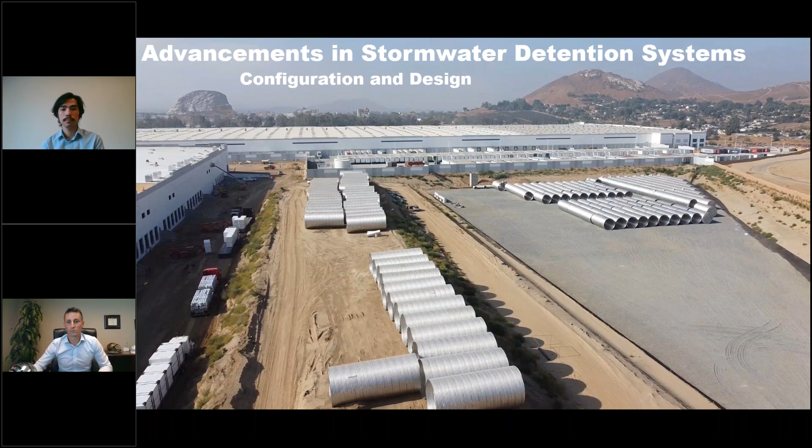Today, we will discuss how to design detention systems faster and how to protect stone void space from solids contamination.

While everyone is still logging on, we'll take this time to start off with a poll question. Our question is, my go-to caffeine drink of choice for when I need to crank out some work or do a design is soda, espresso, coffee or a latte, an energy drink, or another, I don't drink caffeine. We'll take some time now for you to mark your selections, and thank you all for joining us today. Most of you have answered. Thank you. Here are the results. It looks like most people go for coffee when they need to get work done.

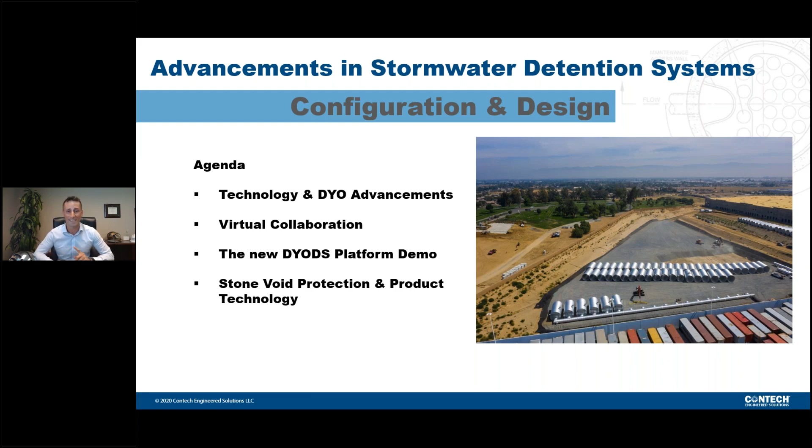Second, we're going to have Yuya review a great new technology that's exclusive to Contech. It's going to protect your design and minimize downstream flooding risk. And best of all, it's an add-on to an already great existing underground stormwater product. I mentioned virtual collaboration. You'll hear that a lot. We have a lot of great collaborators attending this call today. Many engineers have already reached out to us for product tours. We've done it via Teams, via Skype, via Zoom. We've actually designed systems in real time in 3D with contractors, developers, owners, and engineers all on the same call. It's very exciting stuff.

So we're going to dive right into DYO DS first. What is DYO DS? Some of you may know, but it's actually our design your own detention system. The name's been around at Contech for almost a decade, but these updates that we have are definitely killer as we see them. Why did we need such a big update though? We need to discuss the pain points that are out there with design and layout software. We all know that they're out there. What do we have? So users need to share login information on a lot of systems that are out there just to give others access to projects and designs that they've done. Worse yet, you may have to recreate something from the ground up just to get to where you need.

The engineering change process, it's extremely tedious. Last minute changes to a project, running into utilities on a site, they can be killer and just make the software, the layout process, downright unusable. And then lastly, everyone has their idea of what's intuitive and how you can handle the system. How far are you getting with this DYO design and layout stuff? Are you getting 10% of the way there, 25, 50? Are you lucky in actually getting 75 or 90% of the way there? And then lastly, deliverables. Sometimes they take forever, sometimes they don't come at all. And then who knows what's on them? We're really working to change that, to bring up that next evolution of deliverables that we can give to engineers, and engineers can pass those on to others that need them.

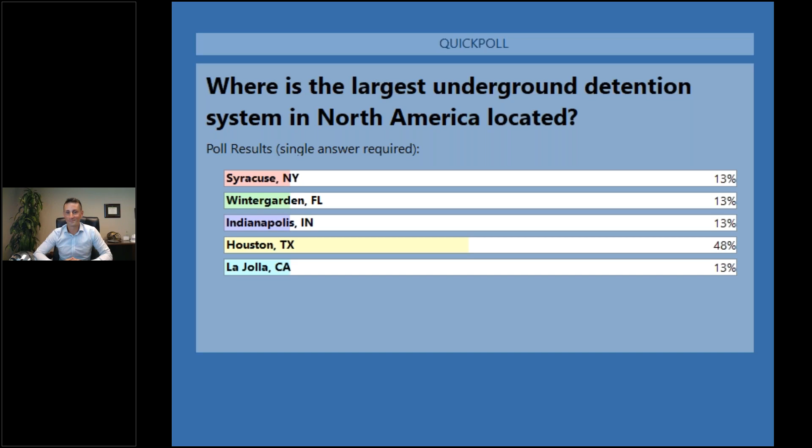Here are the results. It looks like 13% think it's Syracuse, 13% say Wintergarden, Florida, 13% say Indianapolis, 48% say Houston, Texas, and 13% say La Jolla, California, Rob. All right, well, it is Houston. Interesting that everything else was the same.

All right, so we're gonna get right into the thick of things with the demo. So what to look out for as I go through this next portion here. We're gonna design 2 systems, one from the ground up. We're gonna recreate a project that we did. And then the other example that we're gonna give is a very early stage deliverable that's really impactful for what you're able to get out of the system.

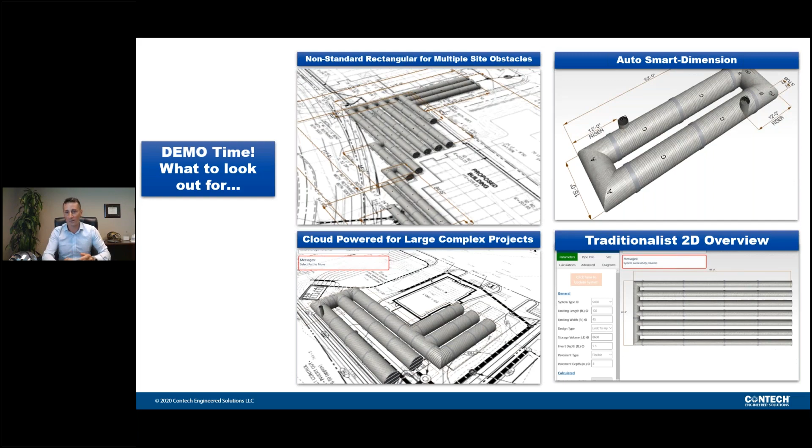So what to look out for. I mentioned non-standard rectangular design. So you see that stair step system in the top left there. Auto and smart dimensioning, top right there. Move risers, inlets, and stubs. Very easy throughout the system. I mentioned cloud power. It's very fast. Don't take that for granted. And then for the traditionalists out there, we do still offer that same 2D environment, same toolbox and CAD system that's off on the right there. So we're going to get into it. I'm going to pull up the actual system itself right now.

I mentioned the all-new cloud system. I got a few example projects here. So for this actual webcast, we're going to go into this August DYO webcast. I'm the only collaborator here, but if I wanted to add Yuya here, I could go in and type Yuya's email address. He'll get a notification that I've started some designs here.

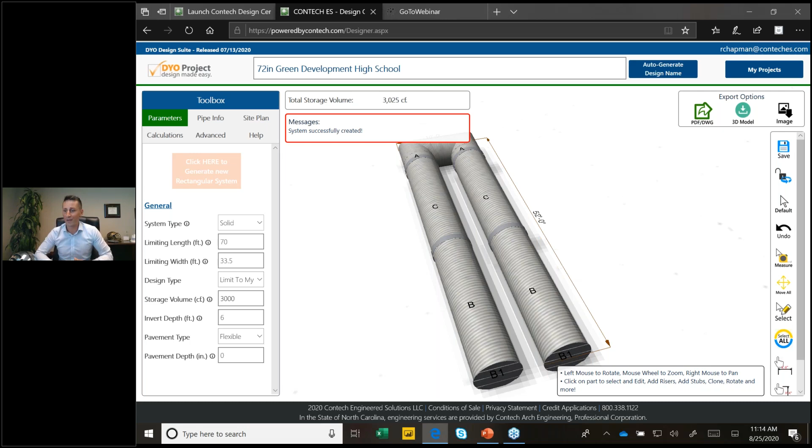So diving into here, the first system we're going to do is an actual system we're going to recreate from the ground up based on something that we've done in the past. And that's a system we did in the Pacific Northwest a little over a year ago. And it's a 21,100 cubic foot storage system. And it was done for a high school to preserve a green area on site. And what we're presented with here is the intro to the system. So I haven't done anything here. I just titled it 72-inch green development, and you're presented with a simple here.

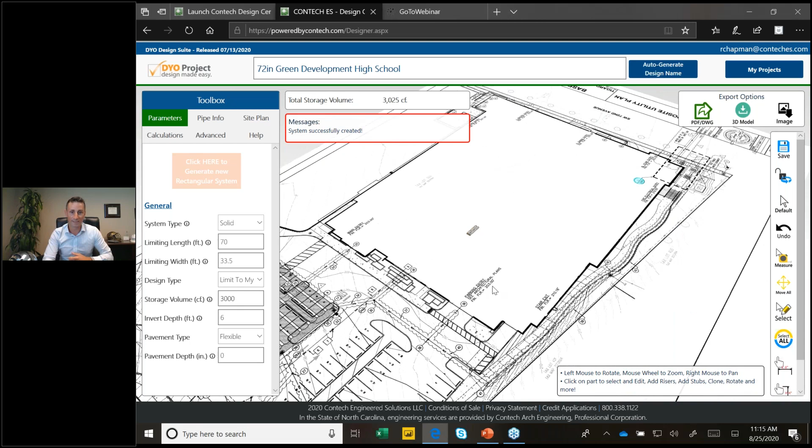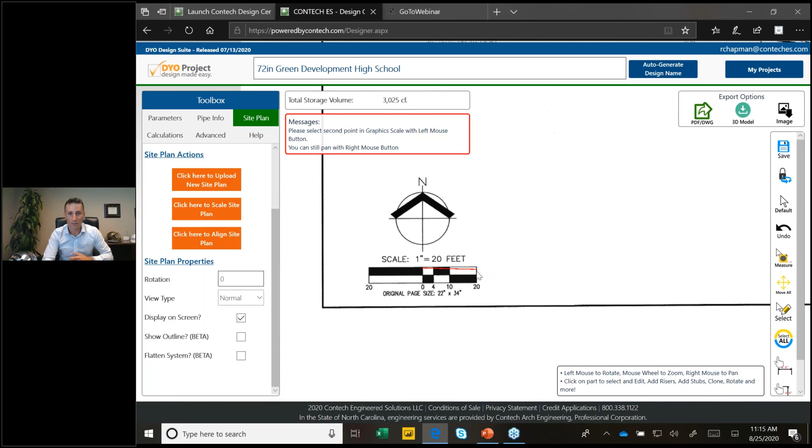What I did do though to speed it up is you could see the site plan here, and it's not to scale, but what we could see here is where the existing system is, and then you have the high school there. So we're going to actually scale this and then start designing. So scale site plan, we'll zoom out and we'll find the legend here. Click there and there, and that is 20 feet.

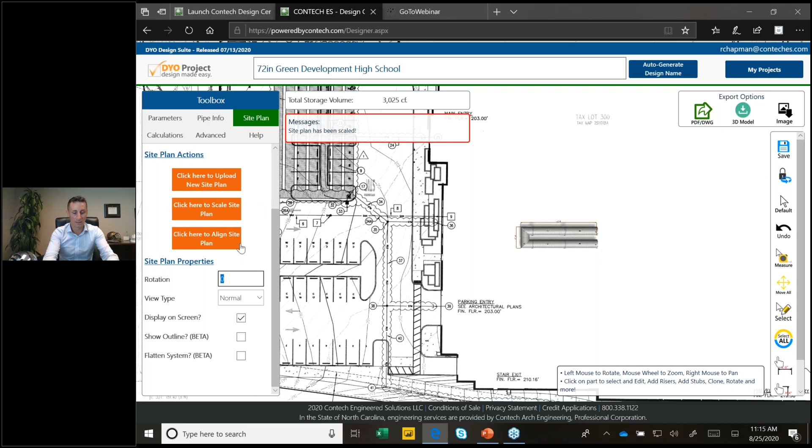There we go. So things look a lot better to scale there. So not every PDF comes in as you want, as everybody knows that's worked with them. So we're actually going to rotate this to be in line with our prior design, negative 90 degrees there. So there you can see the existing system, and then we're going to move this up and then start working from the ground up.

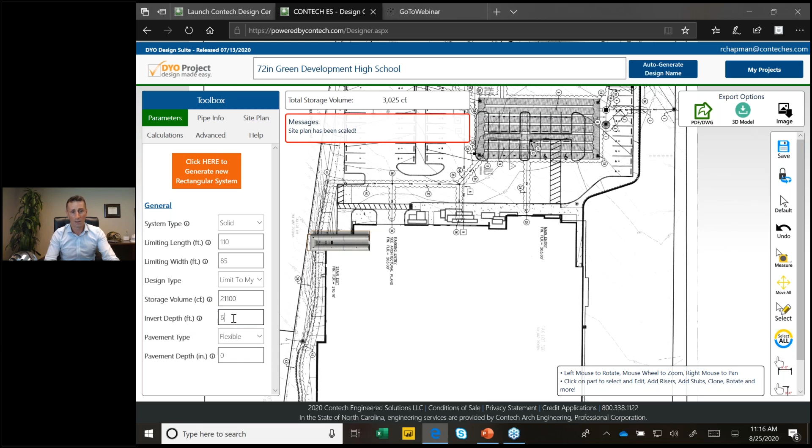So I mentioned keeping it simple and intuitive. So system type solid or perforated for detention and infiltration. This system length was 110 foot. See, I already practiced this. 85 foot wide. I mentioned the two design options. We're going to limit to the storage input because we've already gotten numbers that we need to use for other engineers on the project. So 21,100. This was buried fairly deep for a detention system at 12 feet, and then 4 inches of pavement there.

And then we're going to regenerate that. You can see the system getting bigger there. And we do know that it was a 72-inch system, so we're going to change this from 126 to 72. And then there we go. I'm going to move this so we can see it better. And then we do offer a toggle, so if you want to switch between the traditional view or the actual 3D isometric view, you could do that.

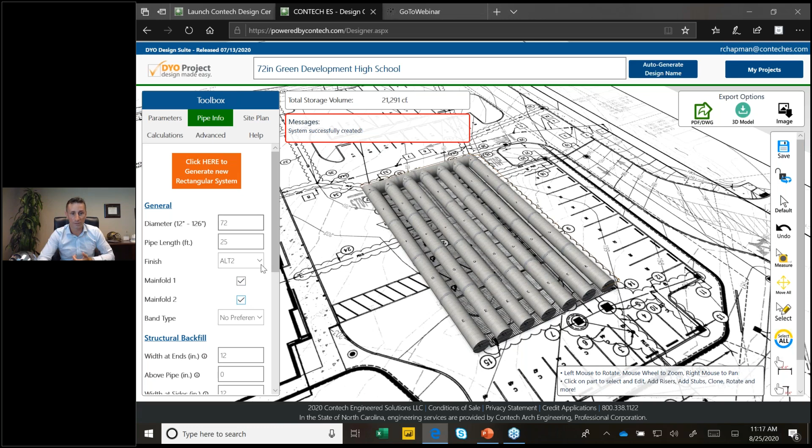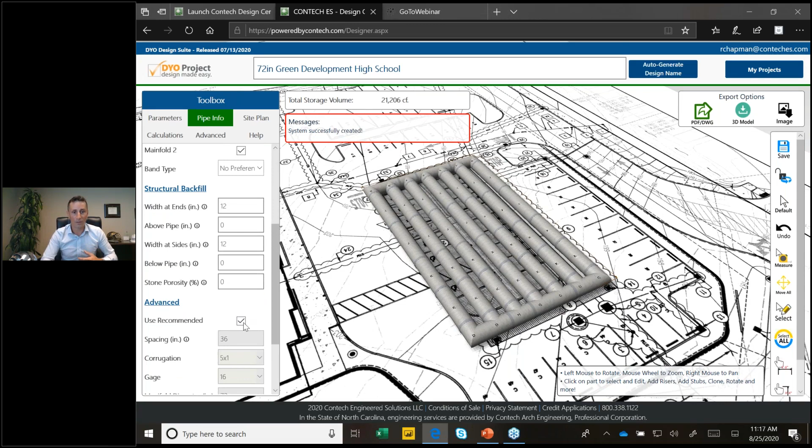Our systems default to bulkheads for efficiency along the whole process, but the system is a little bit older, so it did have 2 manifolds. And in order to do that, in the pipe info, you just click 2 manifolds and then regenerate. And here you can see that it put on that second manifold. There was some structural backfill things that the team had done to get 36-inch spacing. I believe that was the last thing they did before we can start adding risers and tees. So you can see just how perfect that lines up to our existing system.

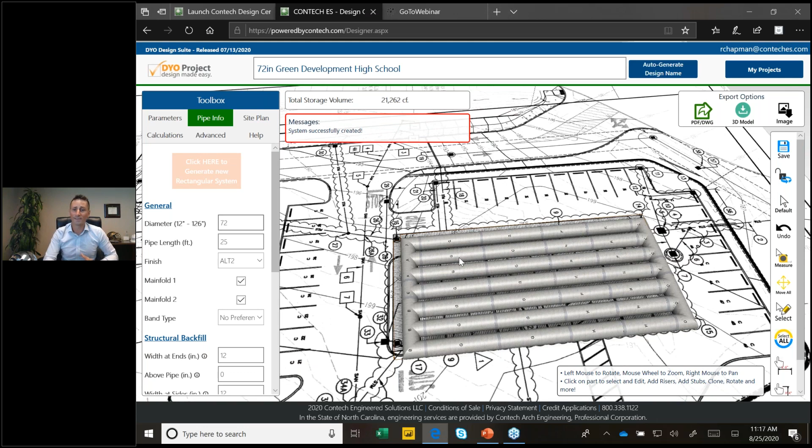So what I'm going to do now is add an inlet right here and then just an outlet somewhere over here, just to give the audience an idea of how easy everything is. So first thing I'm going to do is just make sure everything's lined up. And then we're going to get that inlet pipe. And to do that, our CAD tools are off on the right over there. I believe I'm pointing the right way there. We're going to grab this measuring tool, and we could see that this inlet is 2 foot. So in order to add an inlet to the pipe, you go to the Advanced tab, and that's going to bring up the customization.

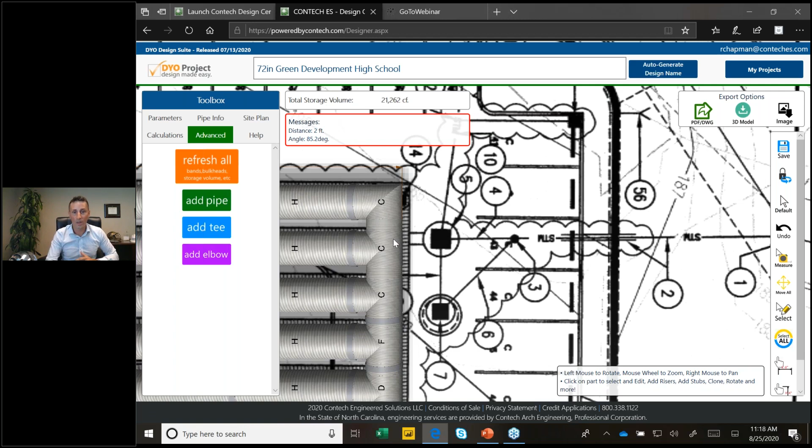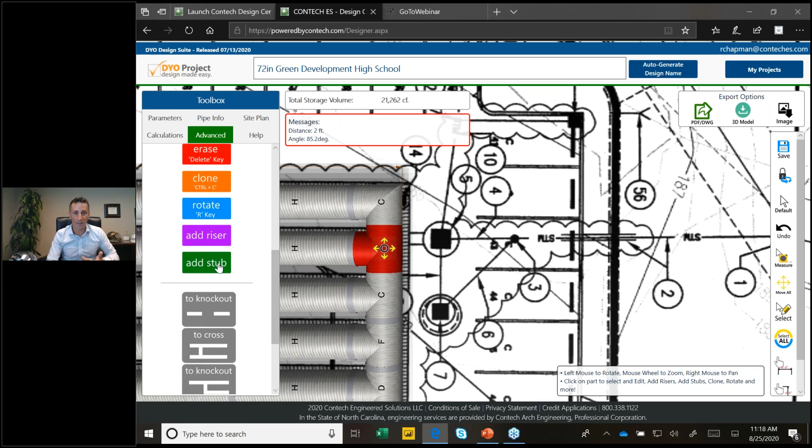So our system's been generally used for 2 areas: full on, we're going to get as many of the risers, stubs, and tees lined up as possible, dimensioning them. And then the next example is just a very generic, we need a deliverable type thing. So I'm going to try and meet halfway with this design. So click on the Advanced section, and then you're going to be presented with a number of options. So you can erase that section, clone it, add a riser, stub, knock it out. So I'm going to add a stub to that. And then you could see as I toggle back over here, it placed a default stub right there.

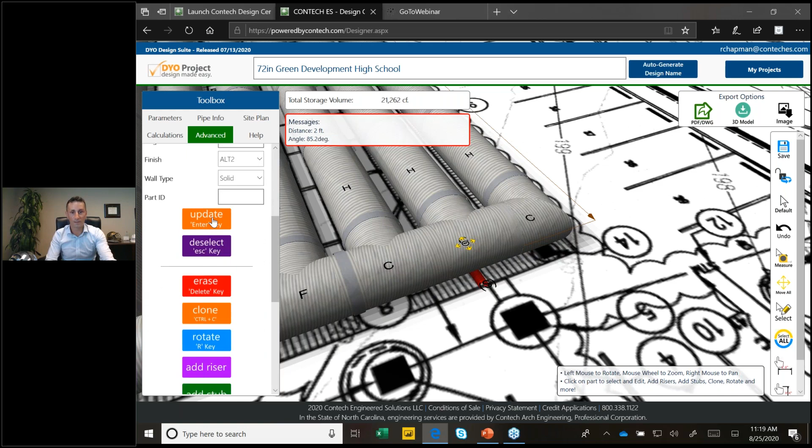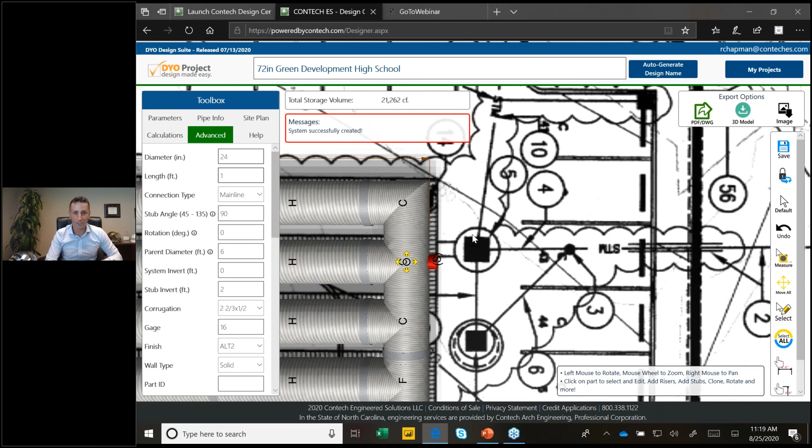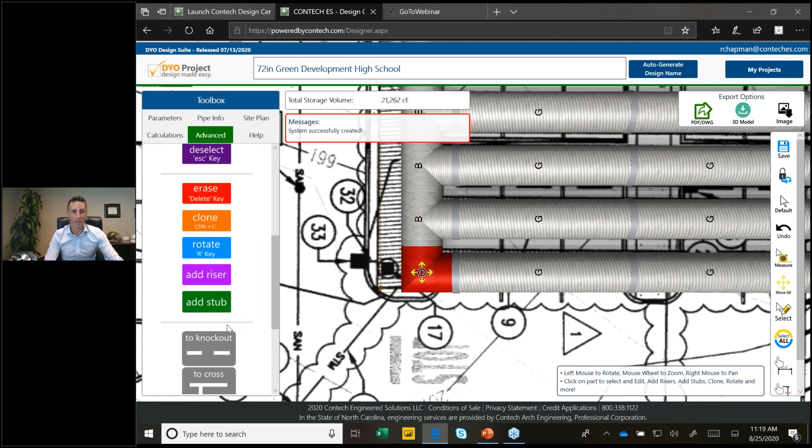So we need to make some adjustments there. I'm going to change this because we know it was 24 inches, 2 foot there, and then we're going to take this 2 foot off the invert, and we're going to update this. There you go. And then I'm going to switch back to 2D mode, and we're going to line this up. So when you click on a piece, you can see you're presented with directional arrows. We're just going to move that to where it needs to go right there. Then we're going to go over here and just add another basic one just to get an idea of how easy it is. So click there, add another stub. We're going to make that 24 inches, and we will take that 2 foot off as well.

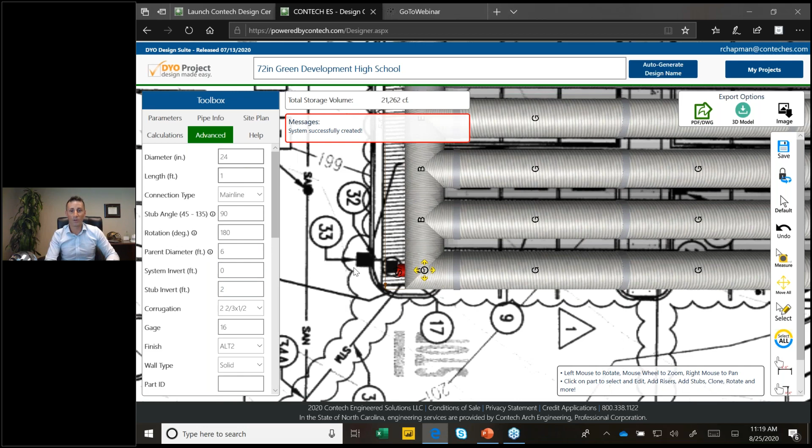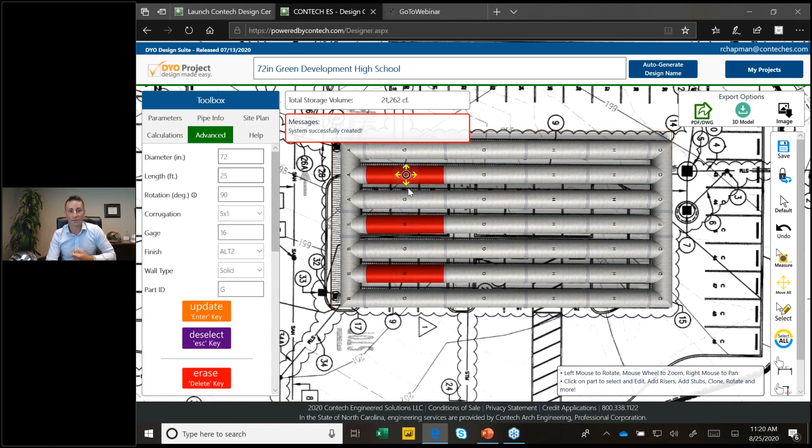All right, and then I believe this system had access risers every other piece. So in order to do that, you can actually click on multiple pieces. Just going to do that, that, and that. So we grab those 3 sections of pipe, and then we're going to add an access riser to those. So now you could see exactly where those are. You could drag them around just like I did with the stub there.

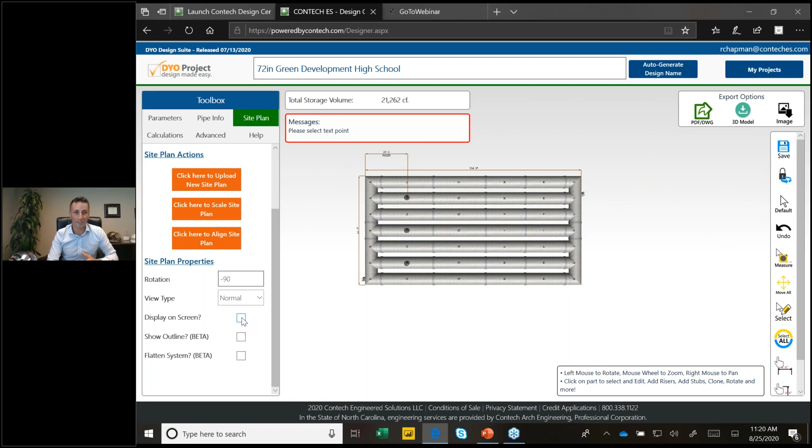And then in order to smart dimension stuff, and you can move things around however you like, traditional CAD tools are off on the right here. You could grab this and then go from point to point and then put your dimensions on there. And to make it easier, if you want to view anything without actually seeing the site plan behind, you could actually click it off so you could see where you're dimensioning to and everything that's going on behind your site plan. So I'm going to leave that as is. On this particular one, they did run into some utility issues.

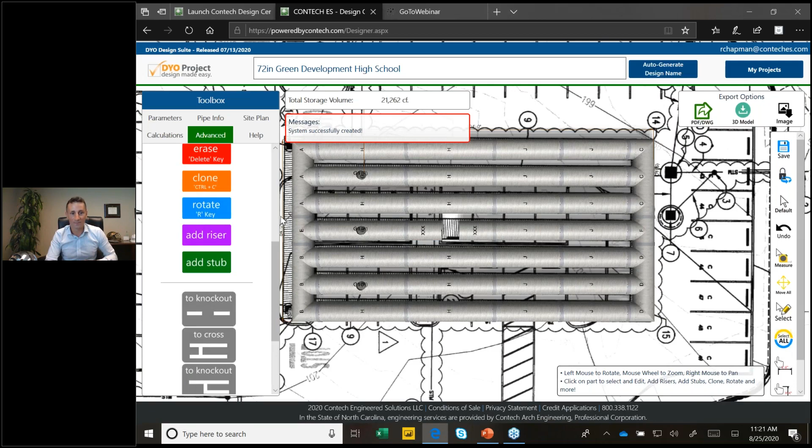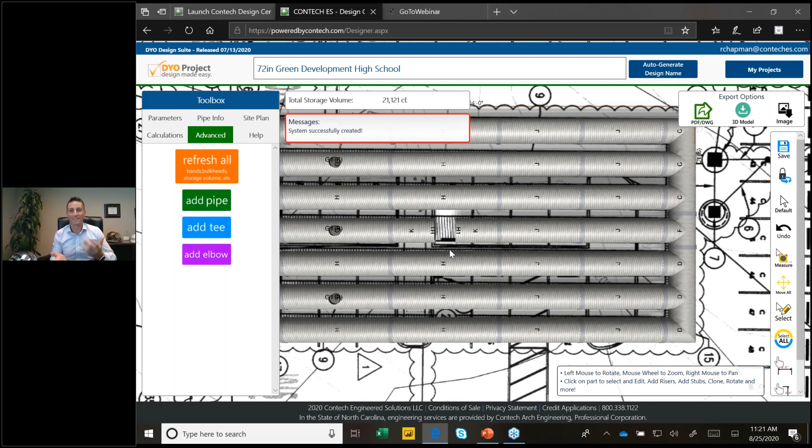And just like adding a riser or a stub, what we're going to do is just go back to the Advanced tab, and I believe it was right in this section here, where they had to knock out a section for a utility pole, and you just go to the knockout. We'll leave it at 5 foot there, and then we'll update everything to make sure that the system automatically puts bulkheads on pieces that have been adjusted for knockouts, T's, and elbows, so it knows where a missing piece needs to be adjusted and make sure that's something that can be manufactured.

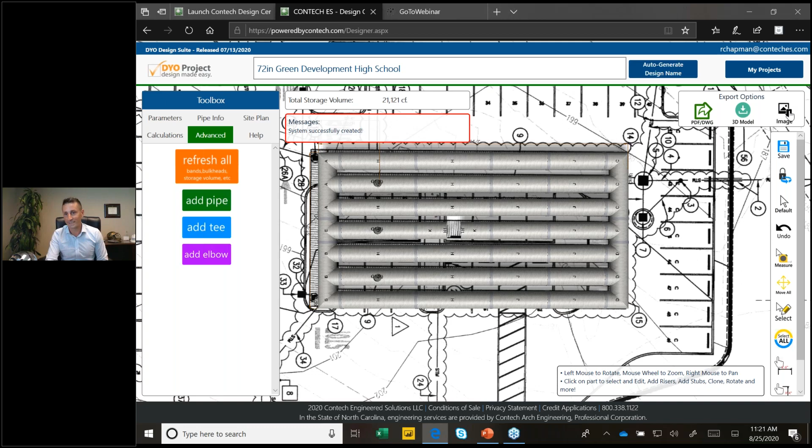We offer 3 outputs over here. So this is the traditional PDF file, DWG file. So the same thing that you got with our prior system, clicking that's going to export that. New to this is the BIM model. So if you need to bring this into another system, you can get a 3D model of this. And then what's been used for deliverables a lot by the community is this image function. All that it's doing is asking you to essentially stage your system how you want on the site plans, and then show you a snapshot so you can put that into another document for yourself.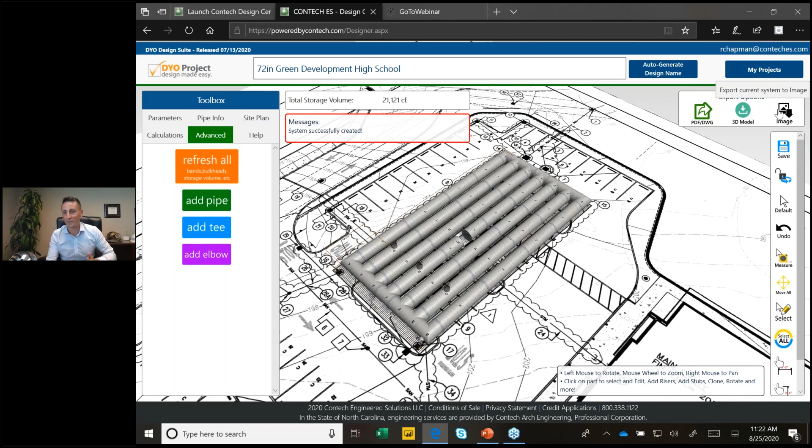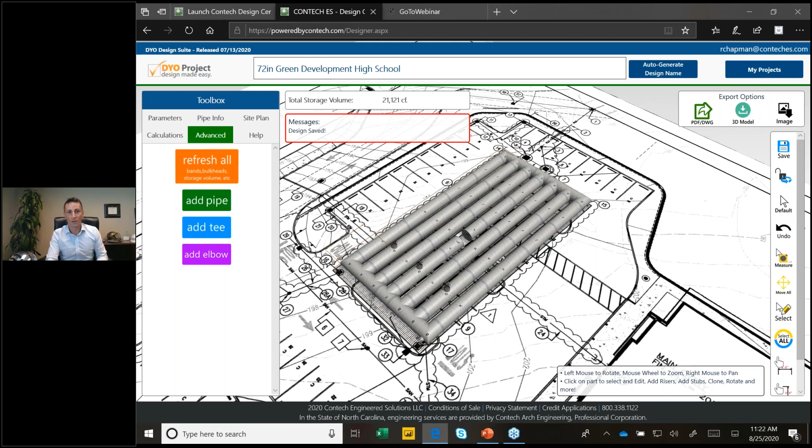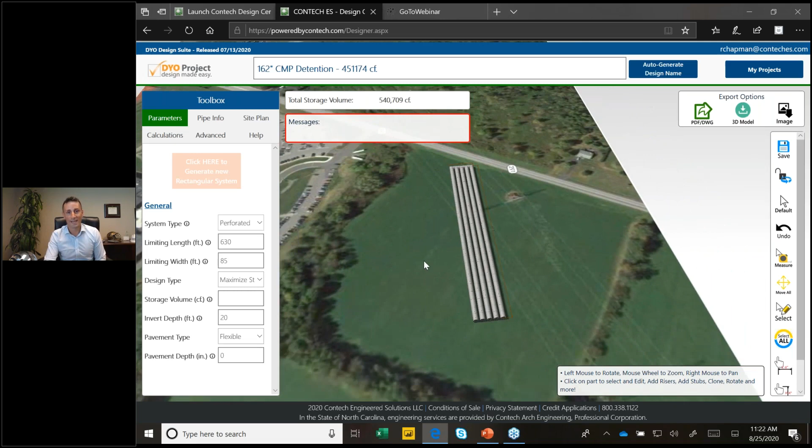All right, so that was the hybrid of the 2 types of designs that we're seeing from engineers, contractors out there. We're going to save this and then hit up the next design. So save, I'll go back into my projects. And then this idea was actually brought to us by an engineer out west, I believe, with wanting to be able to use something very early stage to get out for a deliverable. And what they actually did is wanted us to be able to design on a Google Maps just to get an idea of where something needed to go. Like I said, early stage deliverables.

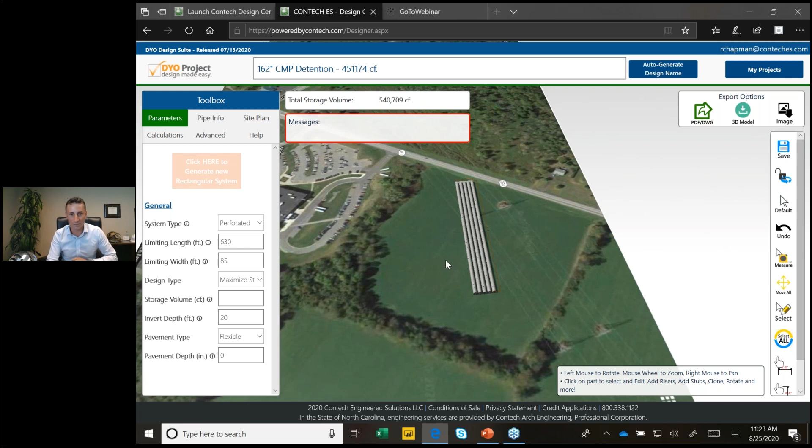So I have imported and scaled this site plan already. This project actually existed. It needed a lot of storage, as you can see. And to give you an idea of the project, there was a warehouse over here and a high school, and they wanted to avoid putting a pond for safety reasons, green space type of thing, somewhere over in here. And we had this very large 162-inch system that needed to go in there. So what I'm going to do is actually align the site plan to make us better aligned with the road. There we go. So it's going to go right alongside the road there. We're going to move it.

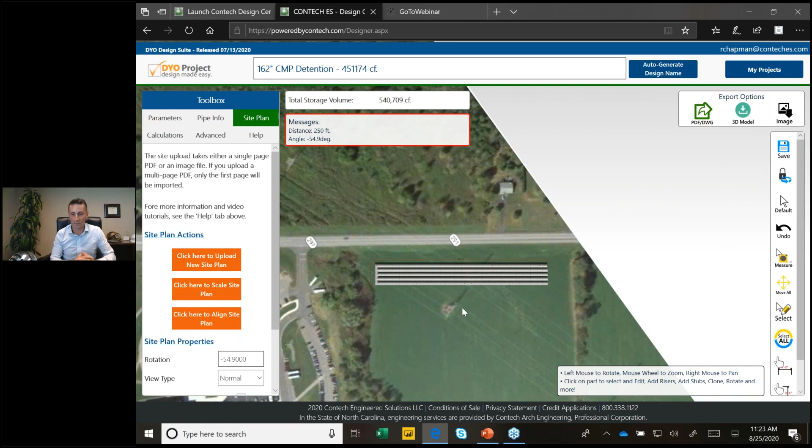And then this system is actually an infiltration system. If you caught the initial project there, there's a perforated or solid type of system. You can do hybrids if you need. We do have projects like that. But the limiting length that they were given was 630 feet. They had 85 foot of space. And what we did is maximize for a given footprint. So how much storage can we get in here? There was a lot of water requirements. So it was buried pretty deep at 20 foot. And then going into the pipe information, you see the 162-inch pipe, 25 foot in length. This was a single manifold system.

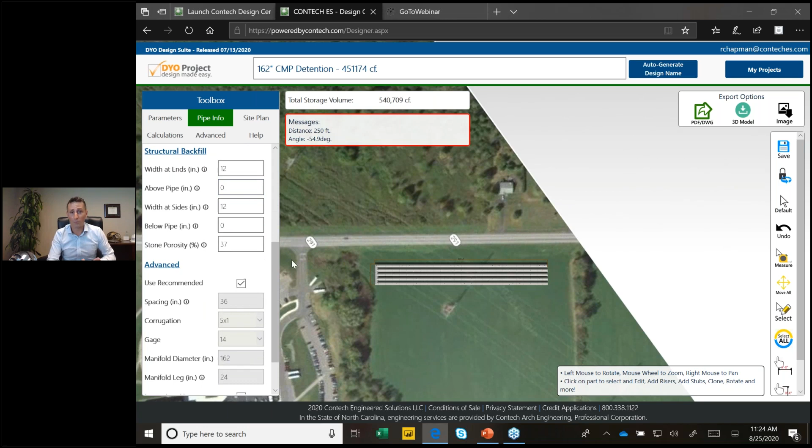The one thing that I do need to change looking at this is, generally in sizes this large, you can get equalizer and smaller diameter manifolds. So I'm going to put one of those on here right now, and we're going to change this manifold to a 60-inch manifold rather than having to fabricate a big 162-inch system. So there we go. So you can see how fast it's working. It's updating storage requirements, giving you the total storage.

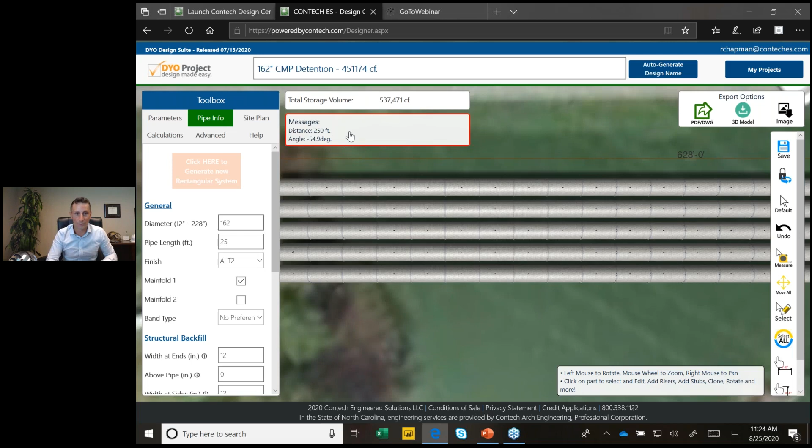If you click on calculations, you could see loading, linear foot of pipe, pipe storage, stone storage, total storage if you had any requirements, and then other calculations that we're trying to fine tune and get everybody exactly what they need from these deliverables. So you can see excavation amounts, pavement amounts if you've chosen to do that, structural backfill, footprint area, and then footprint perimeter.

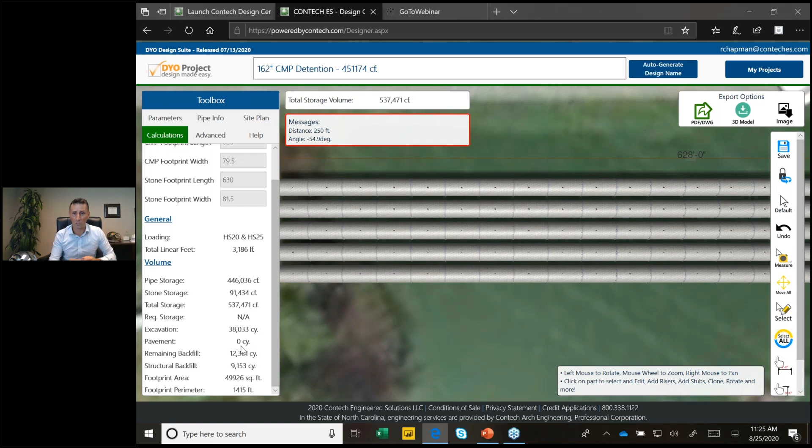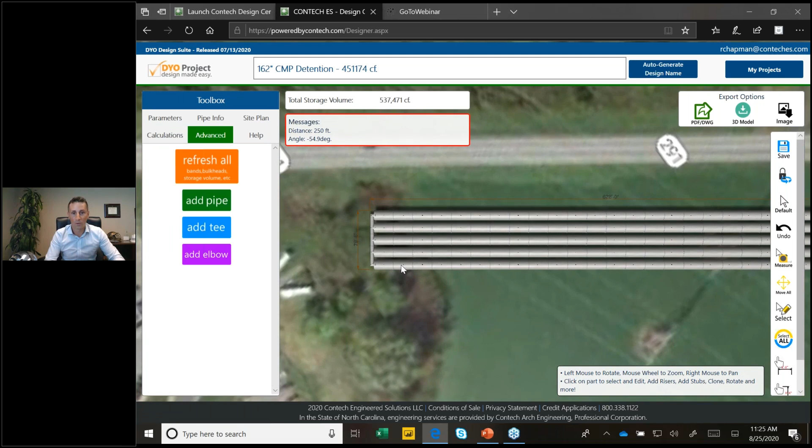So final system looks like this before I go to the deliverables. I'll pan around. You can see that small diameter manifold that's right there. We switched that up to 60 inches and put it on there. And then if you wanted to add risers, something like this, you'd probably need quite a bit. You could just go through and hit the advanced tab and then put them every certain interval, since this is 600 feet in length. There we go. And we'll just put risers there.

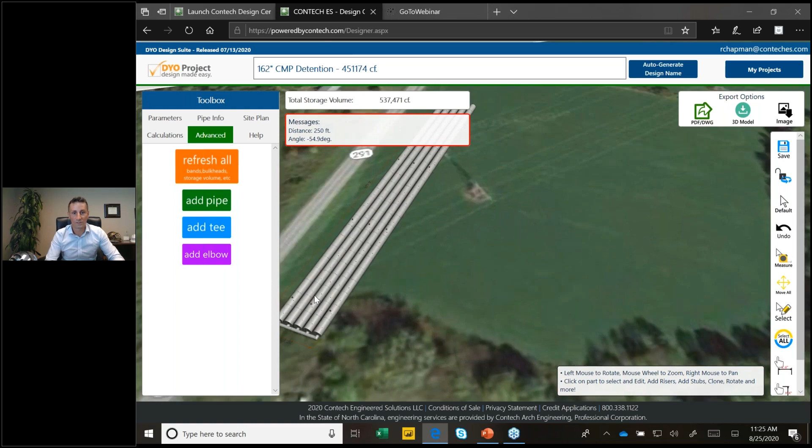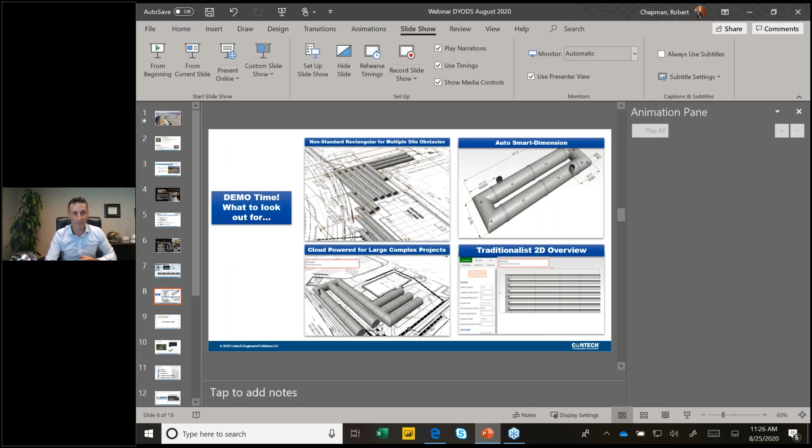The scaling's a bit odd with something this big, but there you can see the manifold with the risers. Not going to go ahead and add a stub, inlets or outlets for time here, because the deliverables are what everybody cares about on this call. So going back to the actual presentation, here are the deliverables. So this is what's included in the email that you're getting from the DYO package.

So off to the left there, you see the high school. Don't see the warehouse, I hadn't developed the design for that yet, but you get some very high level stuff that you need for this stage of the project. It's a 162-inch perforated CMP system. Pipe storage is around 450K. Stone storage around 90. You see the total storage, total area, total perimeter. It's a great deliverable. Our SDE team, that is very well received between them and the community.

And then off to the right there, your standard CAD file, as much as you dimension it. So if you dimension risers, stubs, tees, elbows, make changes to knockouts, and then start dimensioning them, they will show on this DWG file. We need to get you as far as you want in the process, and you could take it as far as you want. There's a lot of options, but what's presented to you in our toolbox is the intuitiveness that we've talked about. Keep it simple. If you want to get more detailed and get further in the process, you can. The further you get in the process, the further we get.

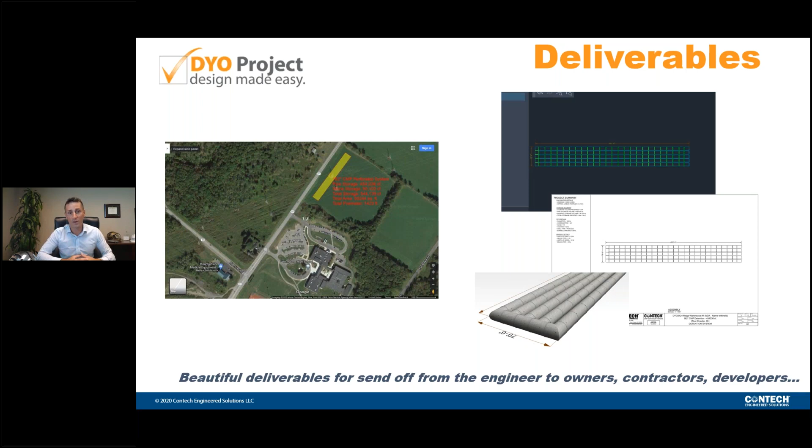Behind the scenes, there's a lot of servers running, powering this. Like I said, 5 times faster. It's generating these CAD files. It's generating stage storage sheets. It's generating fabrication stuff, should it even go forward. So we have everything as up to date as possible in the system. And then in the bottom right there, a BIM model. So there are other CAD programs out there where you can take what's output from the system given to you in an email and use that in those systems.

So a rehash of deliverables, just so you could see it in words rather than the pictures. BIM model, DWG CAD file, design layout, stage storage calculator, and then that really awesome design location on the site plan if you upload that. I will say that we've had some users that have wanted to put multiple underground systems, and all they've been doing is just saving their design. You could see the other system as a snapshot on it and just design a new system somewhere else in the site. So that wraps up the DYO portion. Going forward here, we're going to take a look at the next product that we want to review.

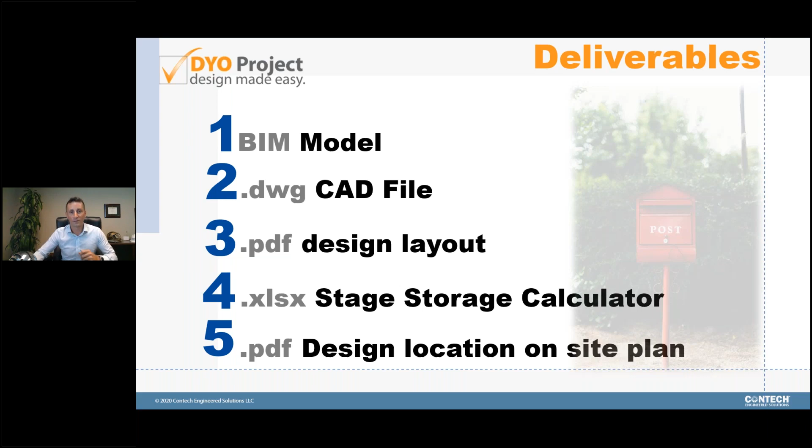And I believe we have a poll question, right, Jill? That's right, Rob. Here's our next question. What stone void percentage do you utilize in design for underground storage? 43% or more, 40 to 43%, 38 to 40%, 36 to 38%, or 35% or less? I'll give you some time now to make your selections.

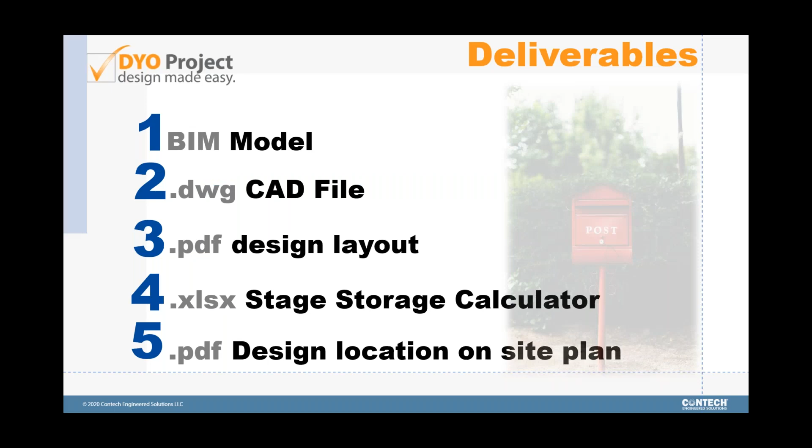And what we're going to showcase right now, we're going to show a video of a new product, the add-on that I spoke about for our existing underground detention product. It's an innovation that we've been developing over the last year. Reliable, protects the stone. It's a low-cost add-on to an existing product. And rather than sit here and go over the technicalities of it, make sure your computer audio is on. I don't know if it's going to come through on the phone, but we do have subtitles for those that are not able to. 2-minute video. It's going to highlight exactly what the Void Saver is, how it can help, and why it aids in design to protect you long-term, minimize that flooding risk.

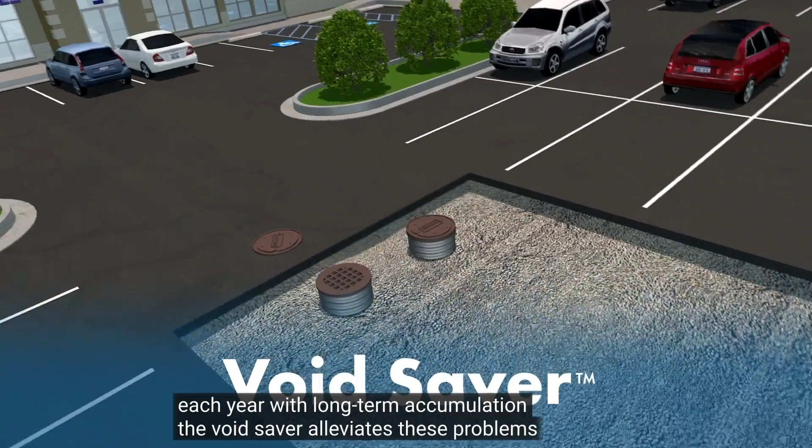Stone void contamination is one of the leading threats to the long-term reliability of underground stormwater detention systems. Contamination from solids can compromise stone void storage before site stabilization and present a compounding downstream flooding risk each year with long-term accumulation. The Void Saver alleviates these problems by containing the majority of storm events within the pipe and only utilizing the stone void storage during infrequent events. As a result, solids are contained within the pipe and not the stone.

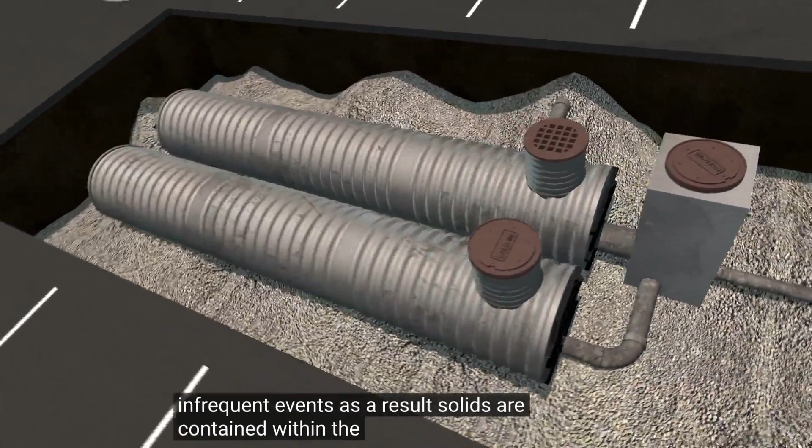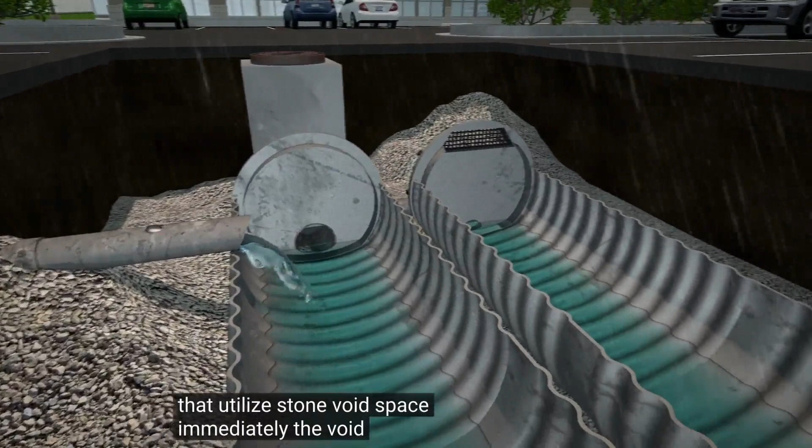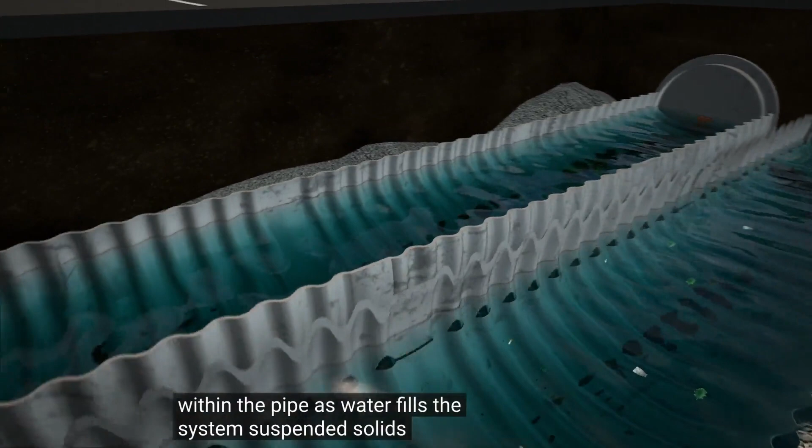Here's how it works. Stormwater enters the Void Saver through one or more inlets from the storm sewer system. Unlike traditional chambers and perforated pipe systems that utilize stone void space immediately, the Void Saver delays the use of the stone void storage by storing the vast majority of rainfall events within the pipe. As water fills the system, suspended solids settle in the large internal volume rather than dispersing into the stone, clogging the stone void space and compromising the design.

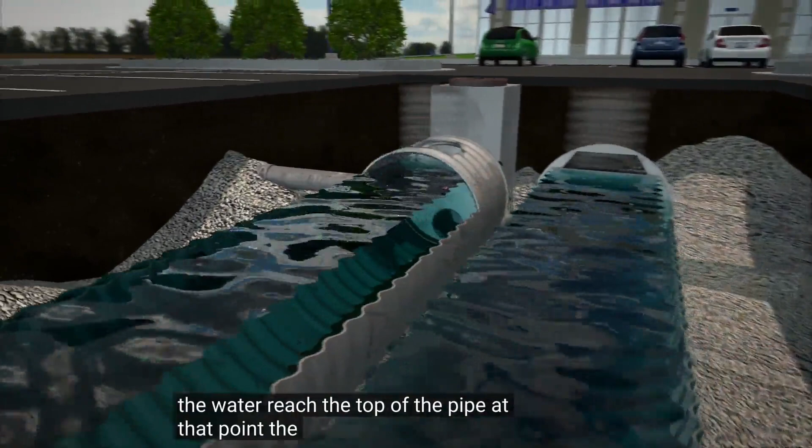Only during extreme events will the water reach the top of the pipe. At that point, the cleaner water discharges to the surrounding stone backfill through a specially designed stone overflow vent. The screened overflow vent prevents any floatables from leaving the pipe.

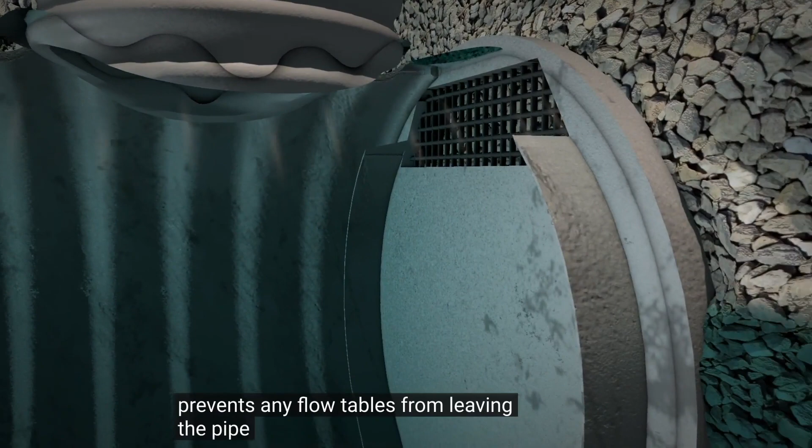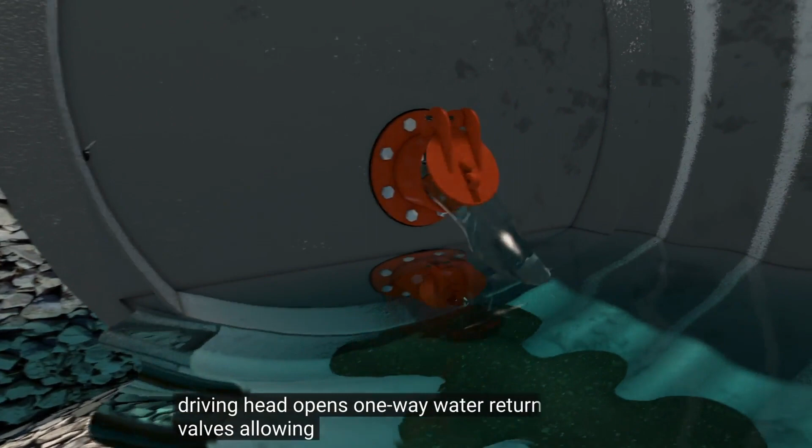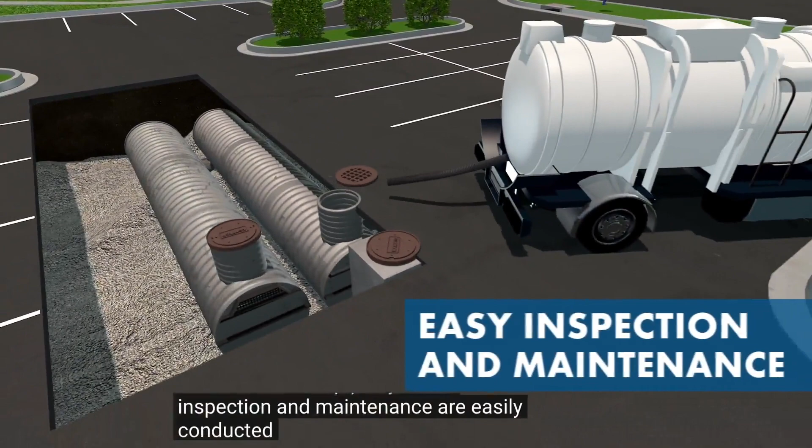After the storm subsides, water within the pipe continues discharging, creating differential head pressure between the water within the pipe and water within the stone. This external driving head opens one-way water return valves, allowing the water within the pipe and stone to drain down together. Like conventional pipe systems, inspection and maintenance are easily conducted through large access risers, where trash and sediment can be removed manually or with a vacuum truck.

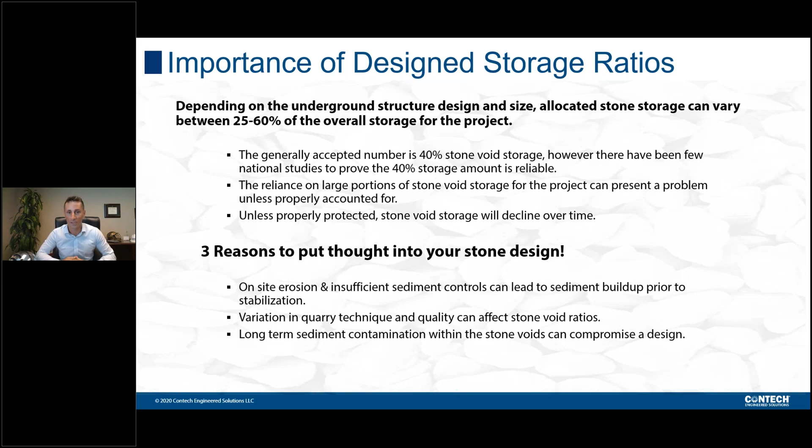Let's go to another poll question, and Yulia is going to take over from here and start talking about why design's at risk right away before you even get to the long-term stuff. Sounds good, Rob. Here's our last question of the day. How confident are you in erosion and sediment control on site? Are you totally confident, commonly implemented, often followed but sediment still finds its way downstream, or they are never followed. Are you kidding me?

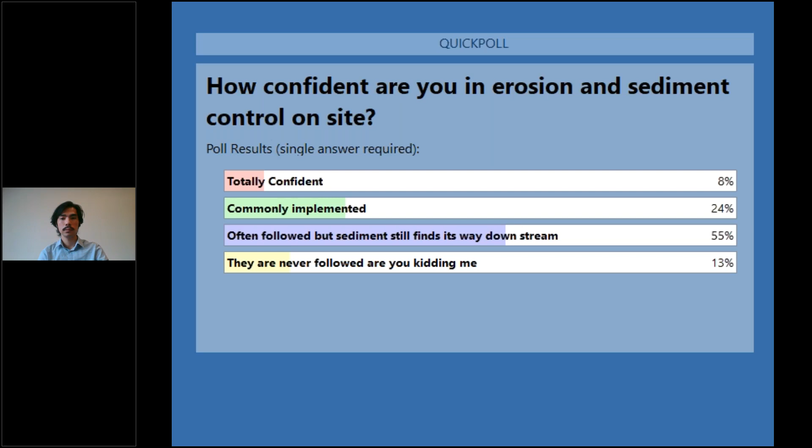Awesome. All right. Well, we're going to have Yulia review just that. Let me move it over. And Yulia.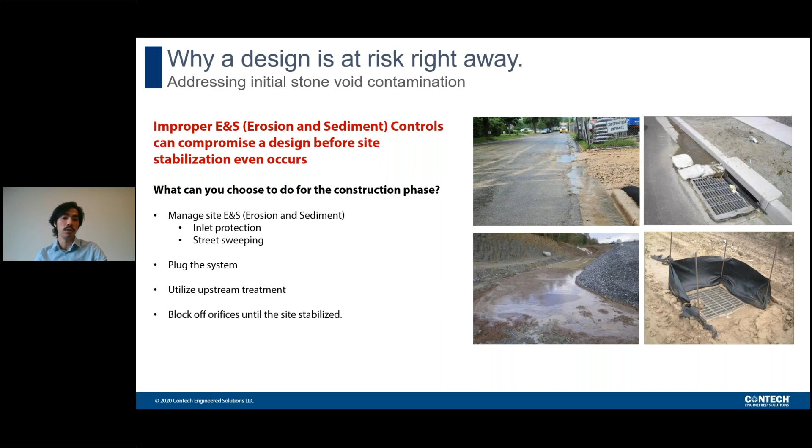Would I need to consider a factor of safety for the construction phase? Or, how much confidence can I place in my storage in the stone voids? These are the type of things that you start asking yourself when you look at a detention system design using the voids in the stone for storage. So what we're going to be talking about next.

So we just discussed design risk during installation, but what about after? This is more in tune with what we typically think about as a post-construction BMP. What could be the long-term effects of stone void contamination in terms of the overall storage capacity of your system? So following up on Rob's earlier point, the industry standard for void space storage is 40%, but it was really interesting to see the variety in the poll question earlier. But if I start there at 40%, is it clear that I get 40% for the system's design service life?

There's no doubt that stone voids are prone to buildup of sediment over time, and there's no going back once the voids are occluded, which results in a permanent loss of storage capacity. So with that, the end goal would be to minimize the reliance on your stone storage. And by doing so, you maintain as much of the storage capacity as possible for your system, reducing downstream concerns.

So here I have a graph comparing a variety of materials of varying shapes and sizes. From the top, 48-inch diameter CMP, 96-inch diameter CMP, 30-inch chambers, and 60-inch chambers. And given the following situation, say if 20% of your stone voids has been occluded due to sediment buildup over time, how much overall storage of your detention system would be lost permanently?

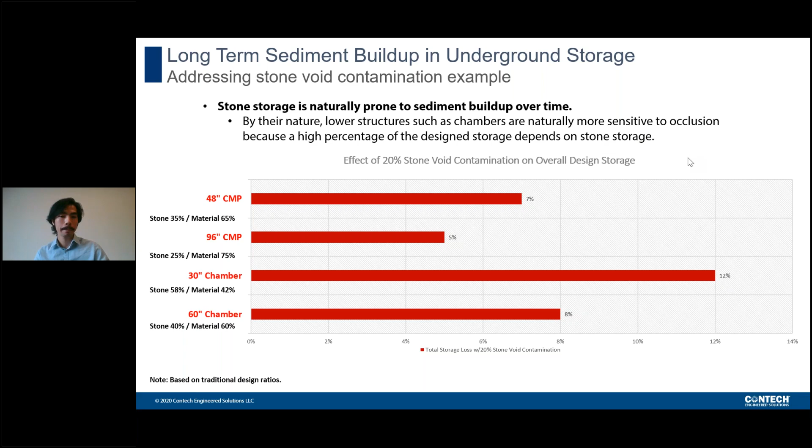So in summary, and given these challenges with stone storage, both during installation and as a post-construction best management practice, just as we talked about, how can I specify a detention system with confidence that relies on stone storage, but does not compromise my design? And this is exactly what the Void Saver looks to address.

The service life of your voids would effectively need to match the service life of the material for your system as well. And by limiting the use of stone storage until it is really needed for the peak events, this ensures that you have a detention system design that you can count on. So to summarize, I've outlined 4 takeaways with features and benefits of a Void Saver design. This more or less summarizes our discussion here today.

First being that it protects the valuable stone voids from contamination, which then protects the storage capacity, minimizing downstream flooding risk. And if there's one takeaway here from the presentation, it's probably that. Void Saver also leverages the use of stone storage, so that reduces your overall system footprint, which leads to an overall lower material and installation cost.

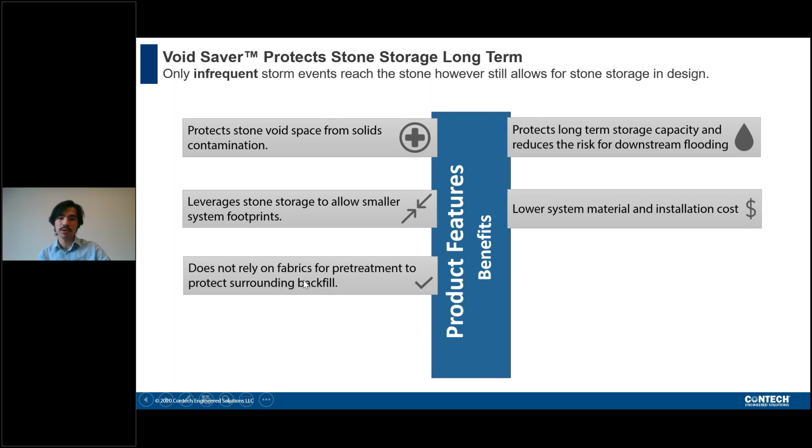In addition, we didn't talk about this in detail, but another feature is that it doesn't rely on fabrics like geotextiles for pretreatment, so that eliminates the concern of potential clogging and ensures a reliable protection of your voids. And finally, specifically the pipe, there's easier maintenance access as well for these systems, which reduces your overall long-term maintenance related costs. So with that, Rob, I will turn it back to you.

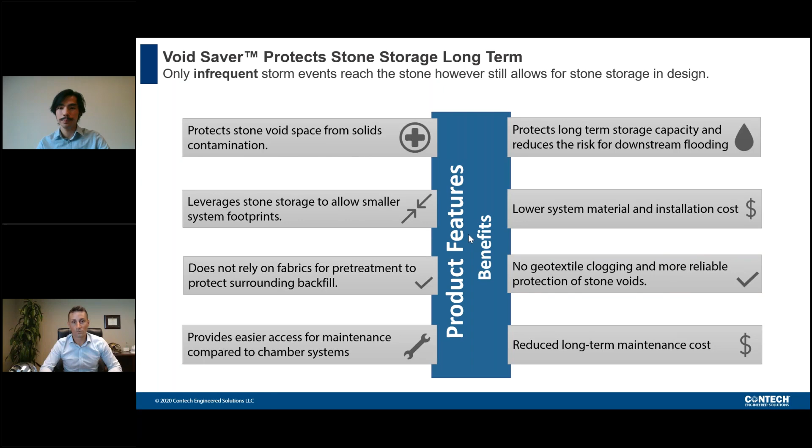All right, thanks, Yuya. So we're at 45 minutes here. We're going to do a quick recap and then Q&A that's come through in the chat function.

So on the DYO front, it can be a pain, but it doesn't have to be. Use technology, collaborate virtually, and then communicate stuff that's a pain for you to the industry out there, and they can make improvements. Deliverables can make or break a project. They can also make the design process that much easier, better deliverables, more efficient. Everybody knows what's going on. And then being able to change those deliverables as you encounter issues on site, utilities, grading issues, etc. Making changes and getting quick redesigns done is key.

And then on the new product technology front, consider the number that you use in stone storage. Don't just default to something that has been thrown out there. And then be a leader, make sure sites follow erosion and sediment control. And then as Yuya mentioned, you saw the video, the Void Saver is a great product, a low cost alternative to stuff that's out there. It's going to be able to protect your design for the life of the project and is pretty easily maintainable, just like the existing system. So that wraps it up for our end.